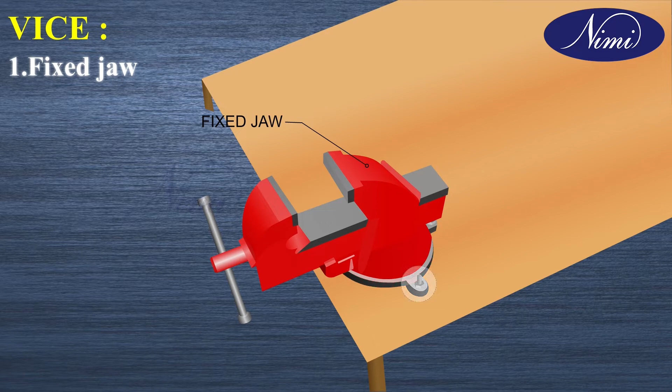Number 2, movable jaw. This is the moving part of the jaw that moves. If you turn the handle, it is attached to this movable jaw, and it moves to and fro according to the direction of rotation of the handle.

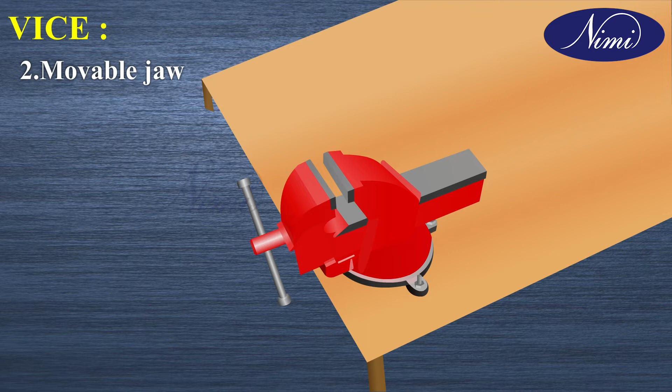It puts pressure on whatever you want to clamp. Only the movable jaw moves and grips the workpiece.

Number 3, spindle. When you rotate the vice handle, it is attached to the spindle, which rotates. This rotary movement of the spindle, attached to the movable jaw, moves it towards the fixed jaw. The spindle of the vice is extremely important.

If the spindle was not manufactured to specifications and has flaws that cause weakness, your vice won't hold well. So the spindle is generally made out of square thread in order to hold grip, and it can withstand more power. Number 4, handle.

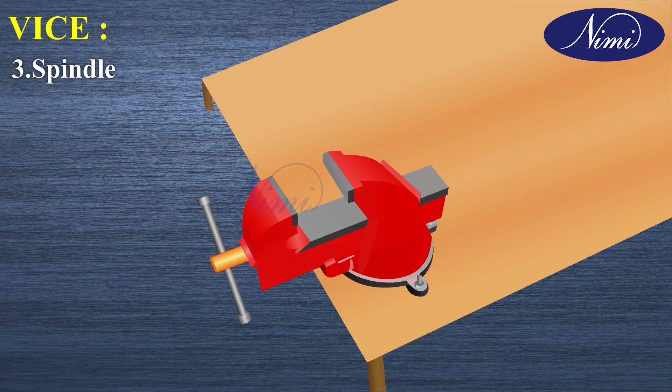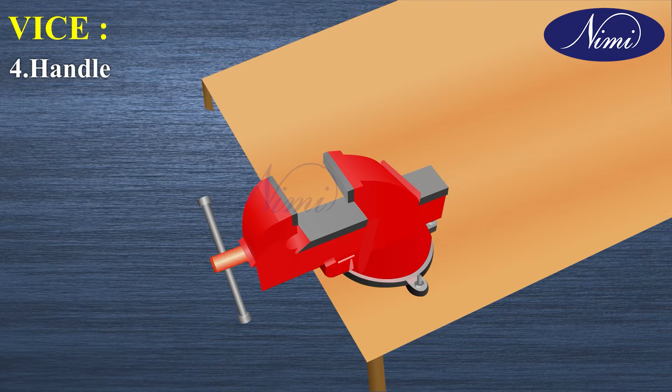The handle is attached to the spindle for easy rotation. It is attached to the spindle, and at one end the spindle is attached to the handle. That part we call a knob.

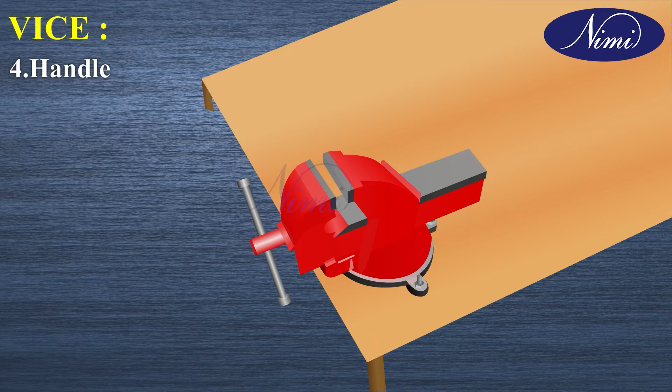K-N-O-B, knob. The power you put into moving the spindle is multiplied by the action of the spindle. So there is an interrelationship between the spindle, handle, and the movable jaw.

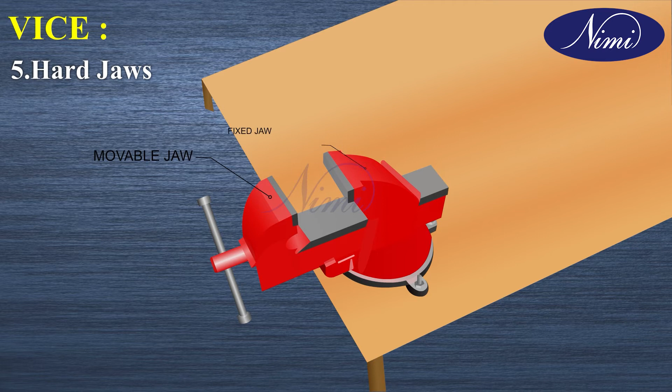Number 5, hard jaws. This is the top part of the bench vice. It is the serrated area on top of both the movable jaw and fixed jaw. This is the part which holds the job grippy.

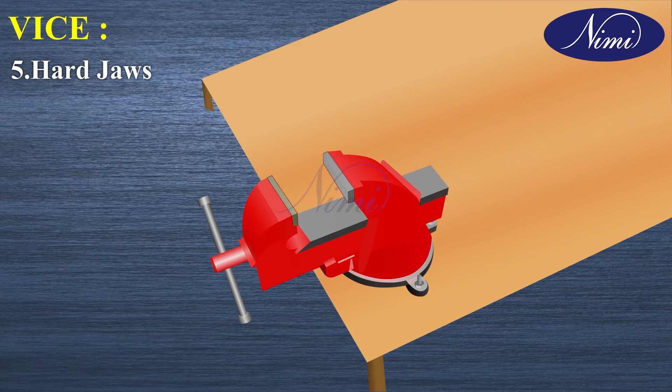If there is no grip, then we cannot clamp the job properly. There is a serration given. Why? In order to hold the job grippy, the serration is given in the hard jaws.

Number 6, box nut. It is the internal part of the bench vice and is fitted inside the fixed jaw. When we rotate the spindle, it is attached to the movable jaw, which moves according to the direction of rotation.

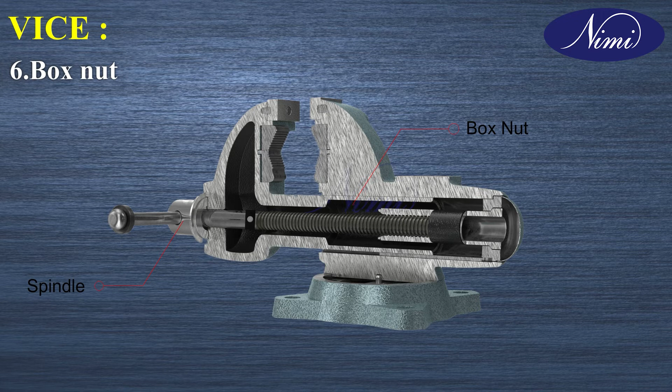The spindle and box nut have square threads. So, just like the bolt and nut principle, when we rotate the spindle, it moves the attached movable jaw forward according to the direction of rotation.

The last and final parts are spring and pin. The spring and pins are assembled to the spindle, internal to the movable jaw. These are the different parts of bench vise.

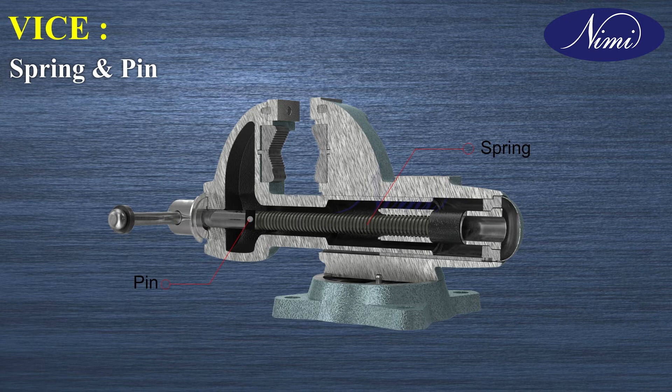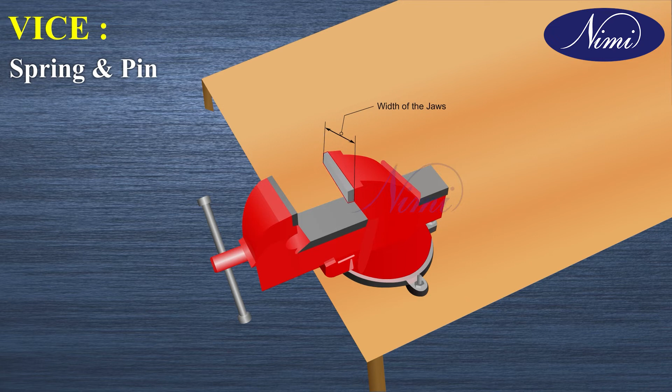Now, how do we specify the bench vise? The size of the vise is ultimately stated by the width of the jaw. For example, a 150 mm bench vise means the width of the jaw is 150 mm, which states the size of the vise.

150 mm, 200 mm, like that - different sizes of vises are available. According to the size of the job, we can hold the job in the bench vise.

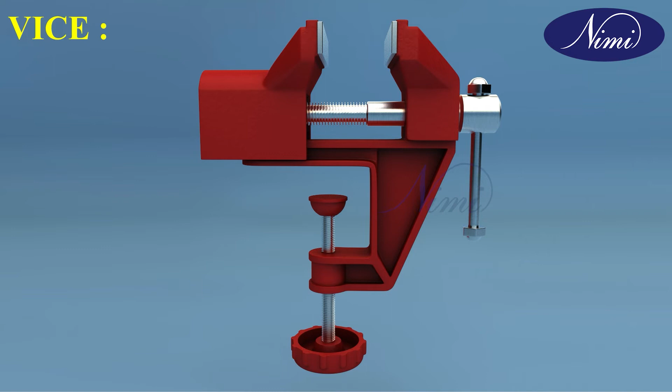The different parts are made out of different materials. For example, the bench vise body is made of cast iron or cast steel, whereas the box nut is made out of gunmetal or phosphor bronze material. Hard jaws are made out of hardened steel or tool steel.

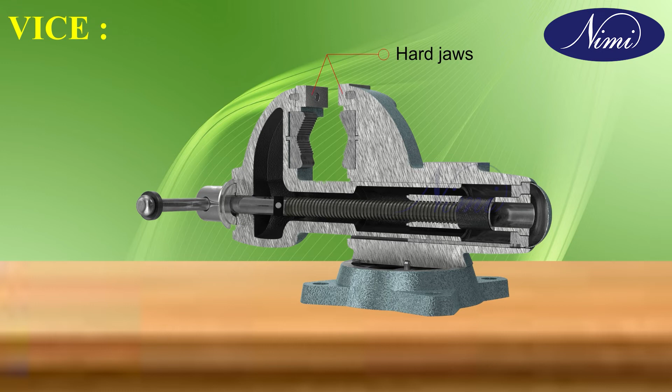Let us see the vice clamps and the soft jaw. Why do we use the vice clamp? To hold finished work, we use soft jaws. Soft jaws are nothing but vice clamps.

They are made out of aluminum fitted over the regular jaws. These will protect the work surface from damage. If you want to hold the finished part in the bench vise, you must always use soft jaws.

Do not over tighten the bench vise, as this may damage the spindle. If you over tighten and give too much pressure on the spindle, it will lead to damaging the spindle.

Now, how do we take care and maintain the vise? Always keep all threaded and moving parts clean by wiping the vise with a cloth after use. Wipe the entire surface area, especially the threaded portion, using a soft cloth.

Number 2, make sure to oil and lubricate the joints and sliding parts. Apply oil wherever there are moving parts. To oil the sliding action, open the jaws completely and apply a layer of grease to the screw.

Wherever required, you can apply grease also. If any rust appears, you have to remove it using a rust remover. When the vise is not in use, bring the jaws tightly together and place the handle in a vertical position.